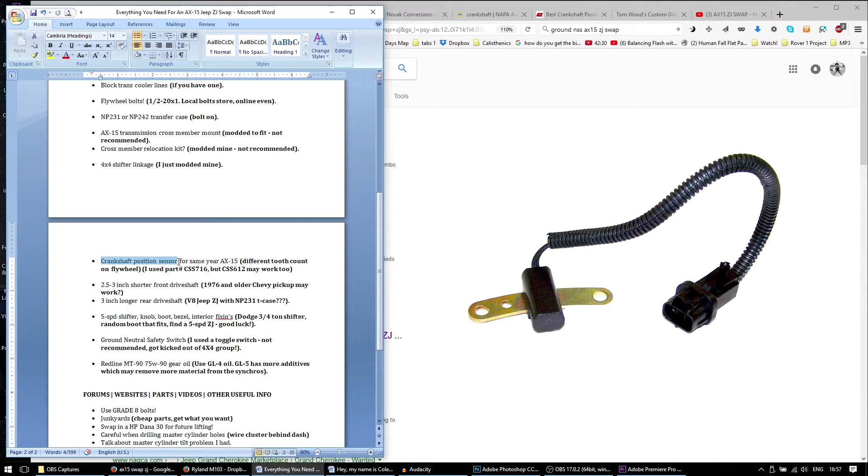Okay, welcome to the voiceover portion of this video, where I will be discussing everything here in point form and in detail. Before I go any further, if I don't talk about something on this list, for example the crankshaft position sensor, if you don't get enough info on this from me today, you can refer to my videos already existing on my YouTube channel.

Under the playlist 'Jeep ZJ AX15 Swap' or something like that, I'll leave a link to it. I cover more info on the crankshaft position sensor there. And if you can't find more info there, there's always a whole whack of forums you can go and find information on, like Jeep Forum, Mall Crawler, and Pirate 4x4. Guys, it just takes a quick Google search and you'll find all the info you need. But hopefully I'll cover everything you need to know in this video, or at least the bulk of it.

So hey, let's get started. First things first, forums, see my videos. Already discussed that. Second thing, the AX15.

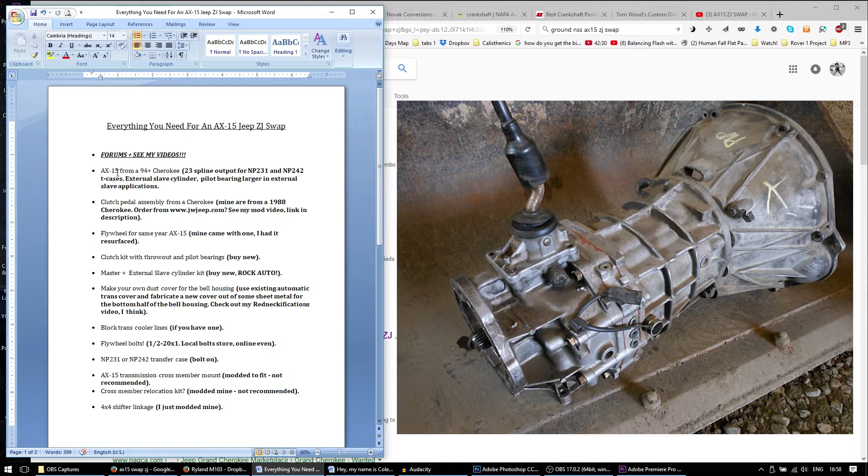This is important. You want an AX15 from a 1994 plus Jeep Cherokee. The reason you want a 1994 plus transmission is because they come with a 23 spline output shaft that slides directly into the 231 or NP242 transfer cases.

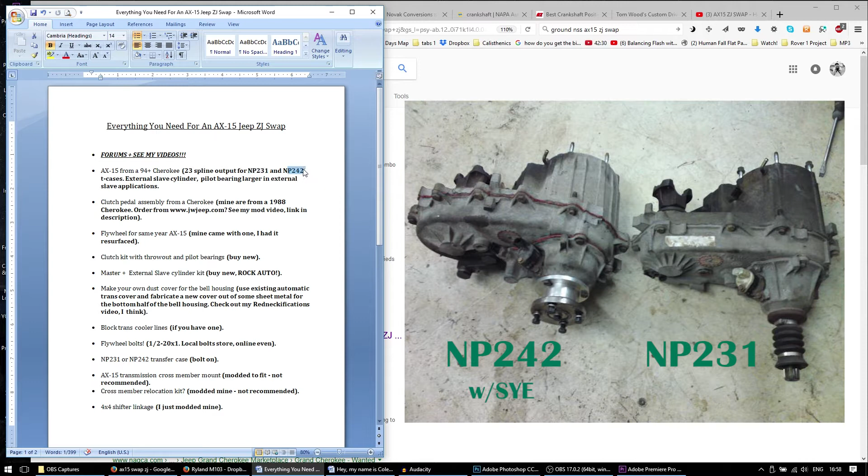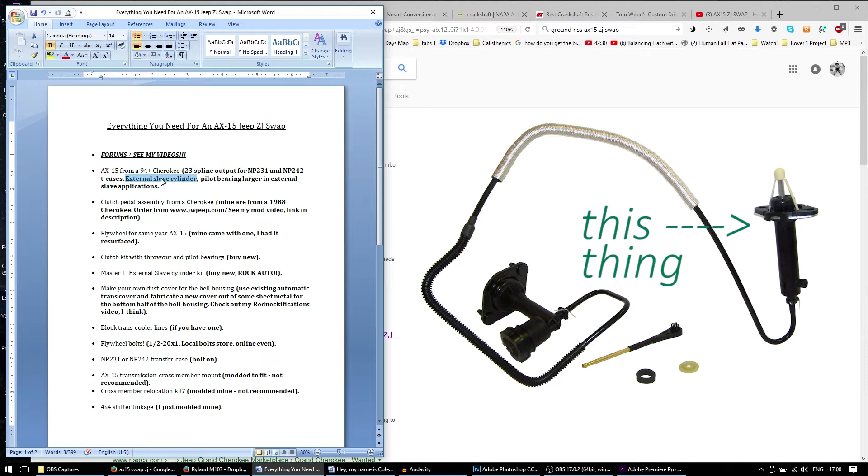Another important thing to look out for when buying a transmission, particularly the AX15, is to look for one that already has an external slave cylinder. You'll save yourself a whole whack of time if you just buy one with an external slave. I think the 1994 plus models already have external. One thing to be wary of: if you buy an internal slave version, not only will you have to get a different bell housing to fit an external slave, but you'll also have to swap input shafts on the transmission itself, because the pilot bearing is larger on external slave applications.

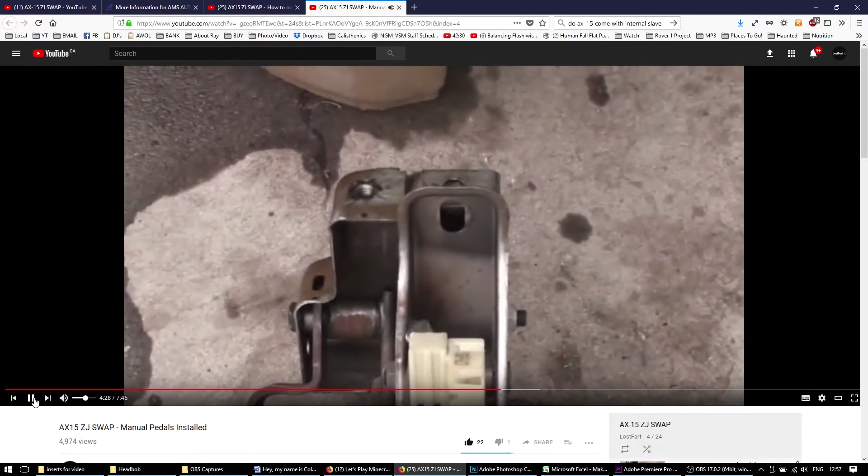Alright, next is a clutch pedal assembly. Now I have a video on this already that details this much better than I'm going to explain it. If you can't find one that's already a stock fit to your Grand Cherokee, which good luck, just get one from a Cherokee, any year Cherokee, and modify it. If you want to go stock all the way, you might be able to find one from jwjeep.com. It's a Jeep exclusive junkyard in California, I think. Who knows, they may have a Grand Cherokee with a 5-speed stock. So check them out if you want stock parts.

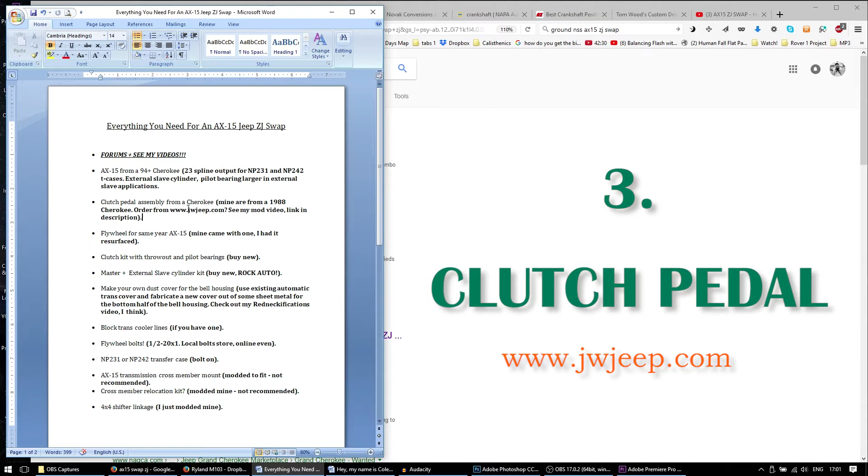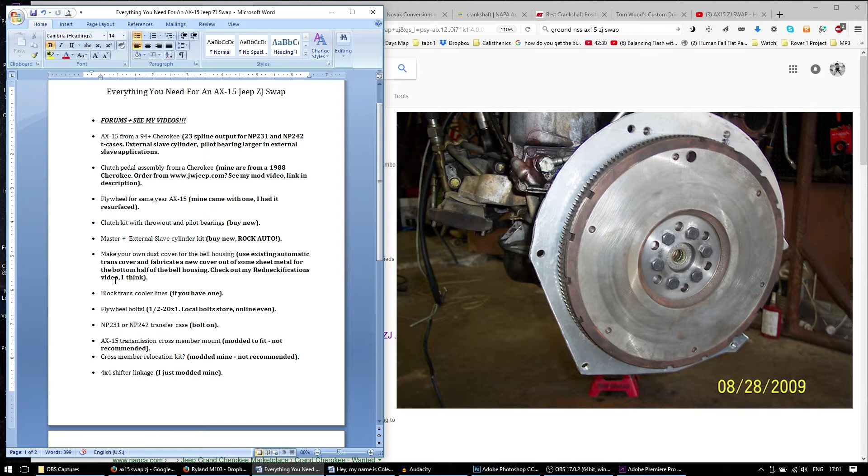You might be in luck. Next on the list is a flywheel. Make sure to get a flywheel for the same year as your AX15. This is important because of the tooth count on the flywheel. The crankshaft position sensor and the flywheel must be the same year for it to work properly.

One thing I didn't get were flywheel bolts. So if you get a transmission and it comes with a flywheel but you're missing a bolt or something, go to your local bolt store. I think they're 1/2 by 20 by 1, so you can even get them online. Any bolts you need, make sure they're grade 8 bolts as well. I wrote that down here. Use grade 8 bolts when you can, always.

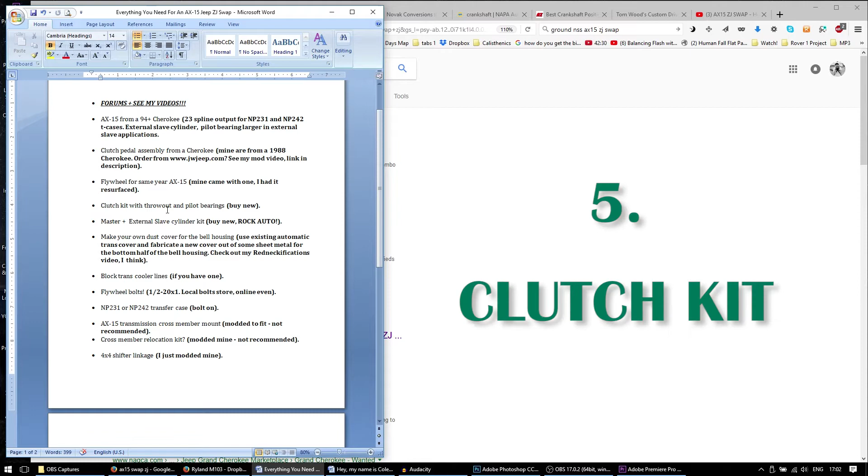Next on the list is a clutch kit with all the fixings. A good site to go to is Rock Auto. Scroll down to Jeep, go to the year. Let's say we got a 1997 transmission, so we're going to go 1997, Cherokee, 4-liter, because that's the motor I matched it up to. Transmission manual, clutch kit, right there, already highlighted. So you've got lots of options, $83.

You've got some high performance ones, $643. Some premium ones, $225, $241. You have lots of options. And say you find one that you like, for example this AMS Automotive one for $103 - it's not bad, not too terrible. You click info, and you can see here, includes all new pressure plate assembly, disc assembly, release bearings, pilot bearings, bushings, alignment tools. So this would be a good one to get.

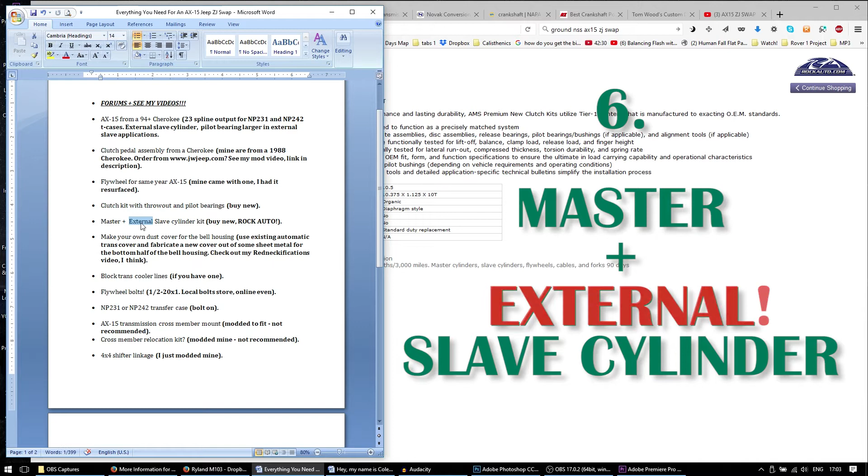It's the full deal. Alright, next on the list is a master and external slave cylinder kit. Now remember, external slave, don't get confused with internal and buy the first one you see on the list. Make sure it's external. This is important.

So again, we'll go to Rock Auto. Let's see, clutch master and slave cylinder assembly, right there, 200. And you can find some kits here - Wagner, LuK, AMS Automotive, same brand. Let's see what that's like. Scroll down, it says external. That would work. You can also see by the looks of this thing, this is the slave cylinder. This is the master cylinder, the part where you put the fluid into. This is what an external slave cylinder looks like.

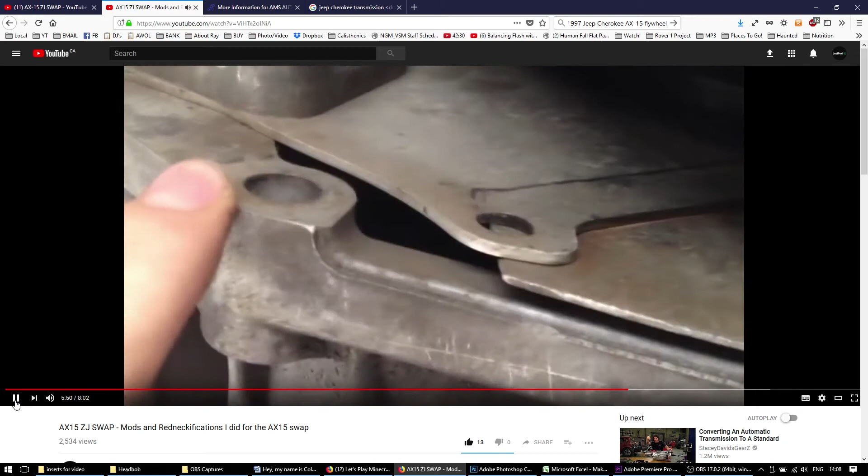Okay, next on the list is make your own dust cover. So a dust cover is the part that goes kind of between the transmission and the engine block. Now the automatic dust cover fits, but it only fits about halfway because of the design. So what I did was I got similar gauge sheet metal and just kind of cut it to fit and drilled some holes, put it up there, and it worked great. I think in my redneckifications video, I talk about that in more detail, and you can see actual video of it.

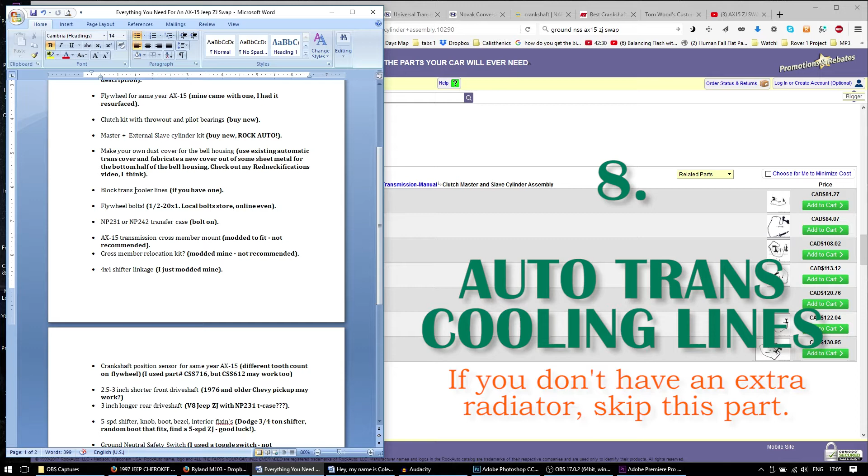Okay, next on the list is your transmission cooling lines. Now when you put a manual transmission in, you can't use the cooling lines from that extra small radiator. So you can either just remove the rad, or just block the lines with a couple Sharpie pens. That's what I did, a couple Sharpie permanent markers. Again, you might be able to see that in my redneckifications video.

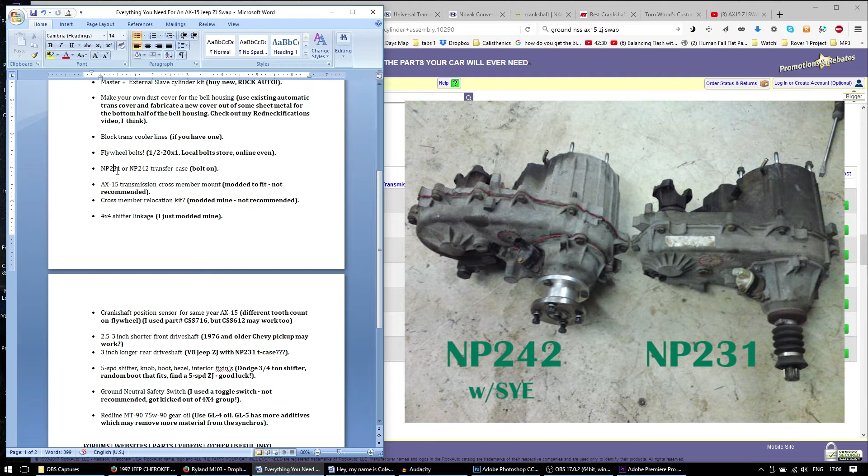Next on the list is an NP231 or 242 transfer case. Now the reason these two are the ones I listed is because they're bolt-on. The NP249, don't know if it's bolt-on. Don't know, but the 242 is for sure - that's the one I use with my Jeep. And the 231 is bolt-on as well. They just kind of slide right in, bolts right up, no further mods. Easy, plus they're far superior in my opinion.

And this one, the 231, is smaller and lighter. So if you care about weight, go for that one. You can find them in Cherokees.

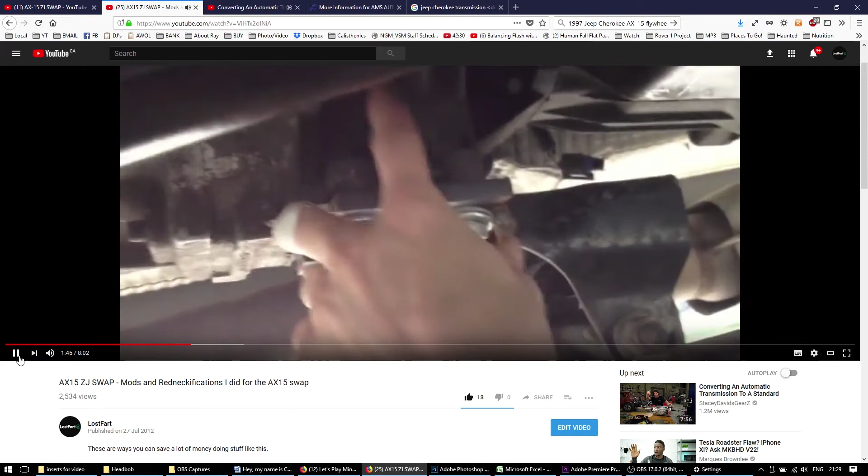Okay, next is the cross-member mount. This I didn't understand in the beginning and there wasn't much info for me, so I kind of had to redneck it together. You can see that in one of my videos, maybe the redneckifications video? I'm not sure, but basically I just got some chunks of metal and welded together a mount. It's not the safest, but it worked.

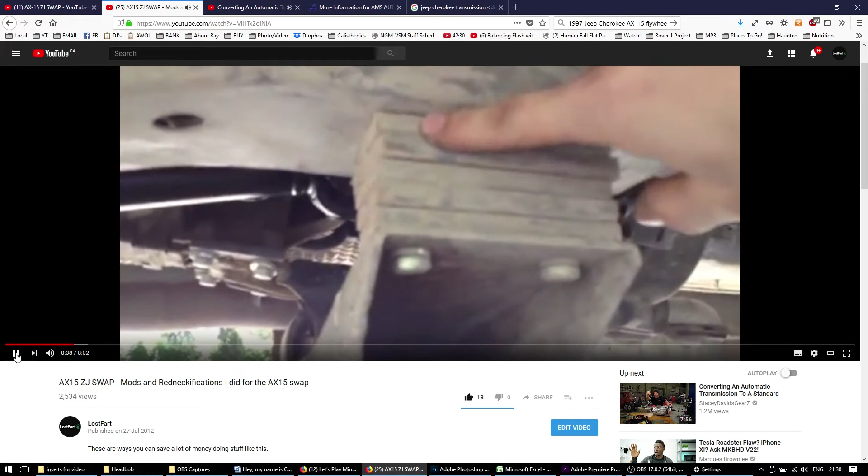So it's something to consider.

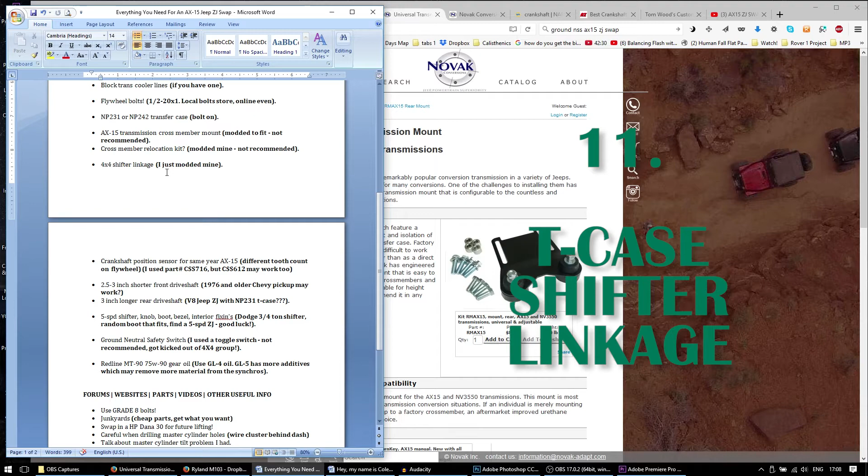Novak Conversions 4x4 shifter linkage. Because the transmission itself is 3 inches physically shorter than the 42RE automatic that came with my Grand Cherokee, the 4x4 shifter linkage was now 3 inches out of place. So what I ended up doing, and you can see this in my redneckifications video, I just got a piece of 1/8 inch steel, welded it to the unibody, and drilled a hole in it. That was the easy, simple solution.

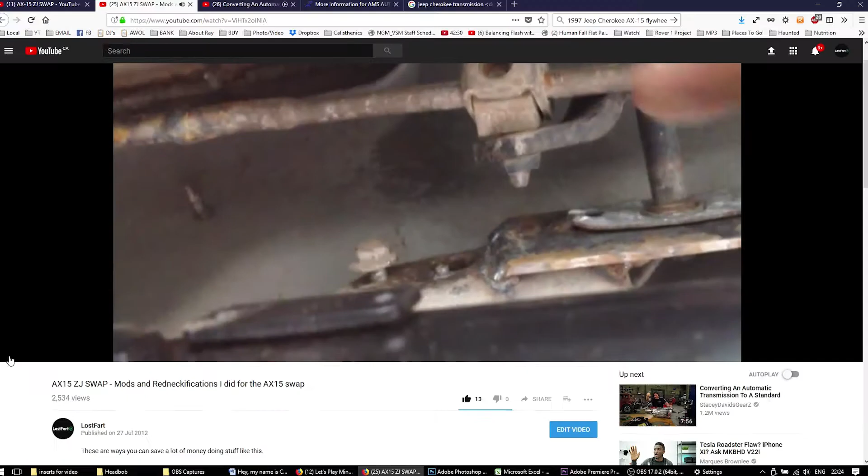You can buy stuff here. So I went to Novak Conversions, to transfer cases, shifter linkages, and came across this page, and there's a bunch of AX15 shifter linkages you could probably get to work if you want a more suitable stock looking thing. It really just comes down to the look. It's a very basic operation, so I just honestly recommend getting a piece of metal, drilling a hole in it, moving it forwards 3 inches, and you're done.

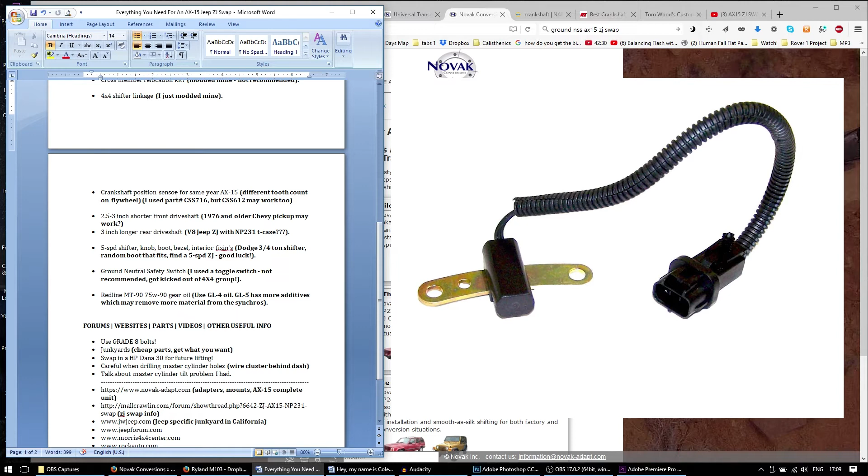Okay, next on the list is a crankshaft position sensor. This is important, I talked about this earlier. You want one for the same year AX15, preferably the same year flywheel, because there's different tooth counts on the flywheels depending on which one you get. You're going to have to Google that depending on your transmission and flywheel, but make sure you have the same year crankshaft position sensor. I don't remember exactly which one I used, but I think I used part number CSS716.

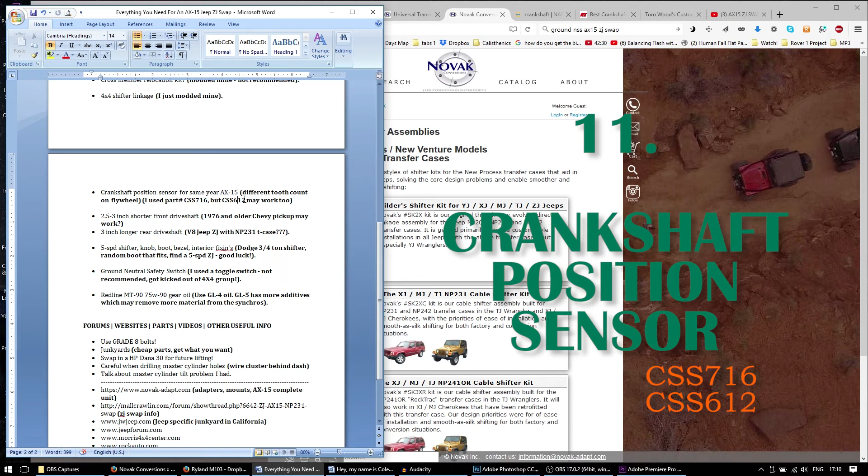I can't seem to find that anymore nowadays. Someone said this one might work, but I can't find that either. I did a little Google search on Napa Auto Parts, and there's a few here that may work, that may fit your Jeep Cherokee.

Okay, moving on to drive shafts. This is probably something that'll catch you by surprise. Oh yeah, drive shafts - they'll have to be different because the transmission's 3 inches shorter. The front drive shaft, because it's a slip yoke, will work without being shortened, but it's risky, very risky. So it's recommended to shorten the front 2.5 to 3 inches because it moves, and lengthen the rear 3 inches, roughly.

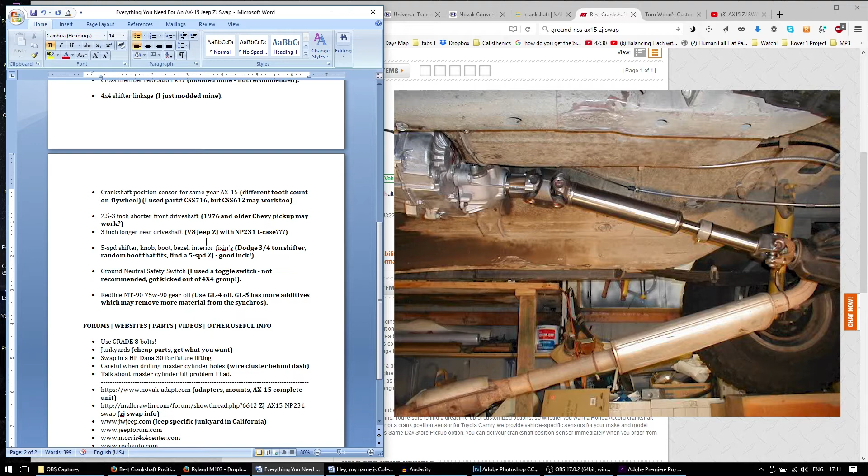For me, I went to a junkyard and found a V8 Jeep with a 231 T-case. I don't exactly remember, it's been a while, but I stole a drive shaft from that Jeep and it was exactly the length I needed.

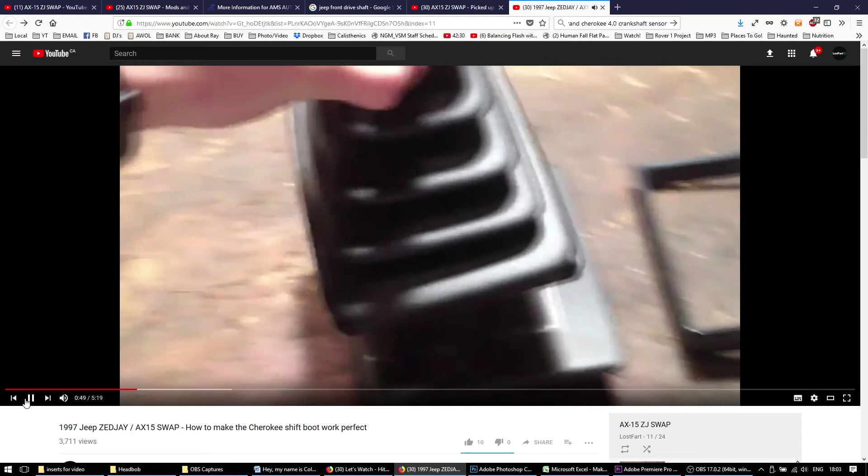So look into that. Okay, next on the list: shifter knob, boot bezel, interior fixins. This stuff is totally custom, unless you can go to that website, jwjeep.com, or find a stock Grand Cherokee 5-speed - otherwise all your interior stuff is going to be custom. I got a Cherokee center console and cut it to fit my floor pan, and I have a video on that somewhere. Then I got a Cherokee boot, and used a Dodge 3/4 ton shifter and knob, and that all kind of fit together and looked pretty cool. You can see in my Jeep videos that it looks pretty nice.

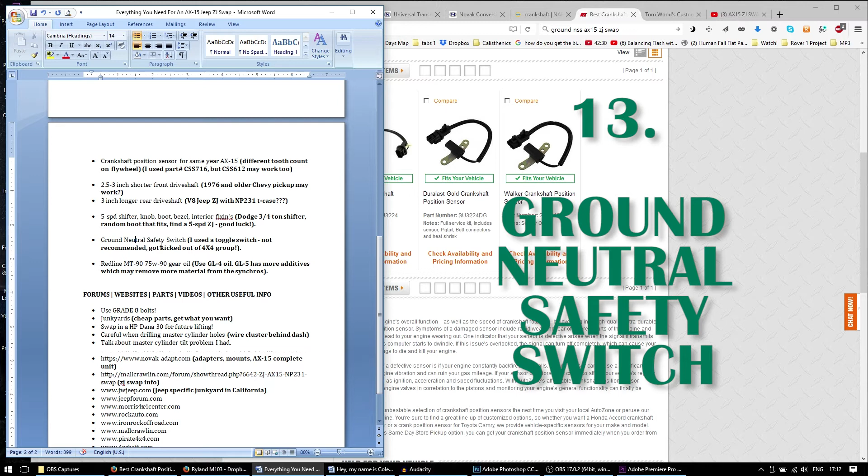Okay, next on the list: ground neutral safety switch. This one's important, I have a couple videos on this alone. It's really easy to ground the neutral safety switch. So when you do the swap, you're going to find a set of wires. Now I forget what the wires are for - let's see, yeah, here's the video I'm talking about, how to ground the neutral safety switch.

End update. You'll find a couple things here. On the automatic, you have your backup lights and your fused ignition switch. On the standard, you have your backup lights and your fused ignition switch, but one thing the standard is missing is the neutral safety switch wire. So basically you're going to have to splice these two wires, backup to backup, fused ignition to fused ignition, and the neutral safety switch is just going to be hanging about. Basically you'll connect that to a toggle switch, ground it somewhere on your unibody, and use that toggle switch to act as your neutral safety switch.

The role of the neutral safety switch is important and actually got me into trouble one day. The role of the neutral safety switch is to prevent you from starting your vehicle in gear. So if you put your automatic Jeep in neutral or park, it will start.

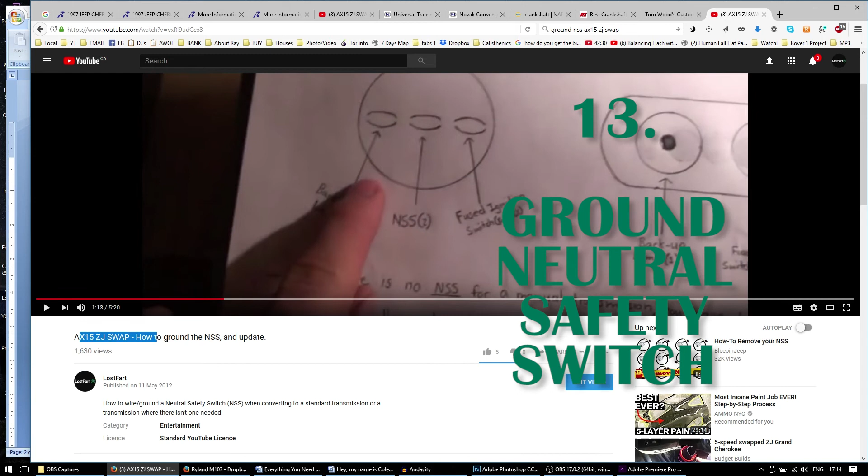Try putting it in reverse or drive, and it won't start for obvious reasons. If you try putting a standard vehicle in gear without putting the clutch down, it won't start either. That's what got me into trouble one day. My brother started my Jeep, and I never had a neutral safety switch engaged, cranked the engine, and it rolled forward and smashed the taillight of this other guy's Jeep. It sucked, but it happened. If you want more detailed info, check out this video: AX15 ZJ swap, how to ground neutral safety switch and update.

Okay, next on the list: gear oil. This is something you might want to consider paying attention to. A GL5 rated gear oil has more additives which may remove more material from the synchronizer rings, which are made of brass, and GL5 may have additives that are corrosive to brass. Whereas GL4 oil, such as Redline MT90, does not have these additives, so it's safer for your synchros. Be all end all, go for a GL4 oil versus a GL5 oil.

And you can find out if it's GL4 or 5 just by looking on the bottle.

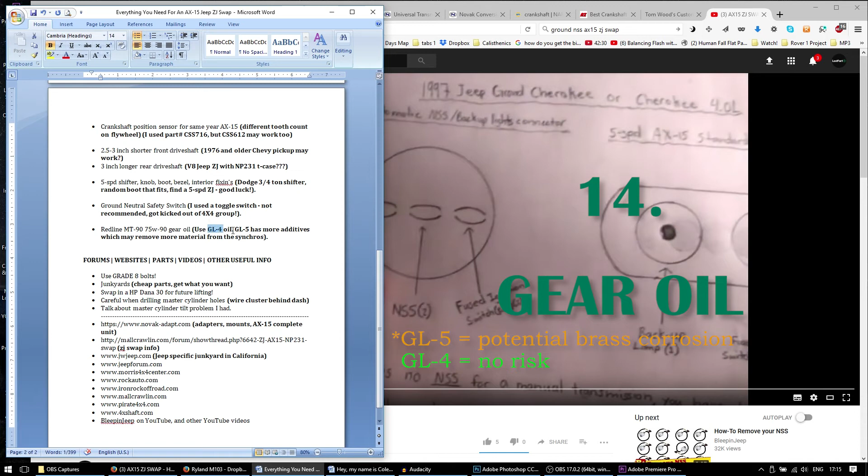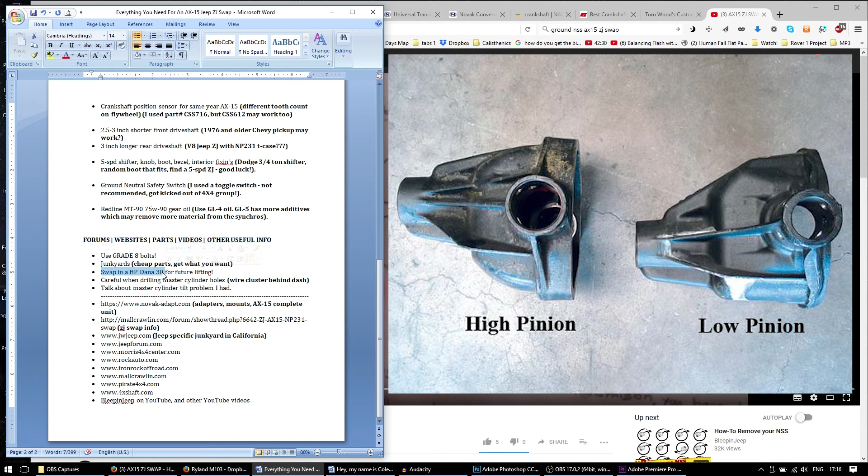Some other useful info: I already mentioned use grade 8 bolts, go to junkyards when you can. Something you might want to consider is swapping in a Dana 30 high pinion. Your Jeep Grand Cherokee cannot come with a high pinion, it comes with a low pinion Dana 30, which is fine, doesn't matter. But if you plan on going off-roading a lot or getting a big lift kit, a high pinion will reduce the driveline angle and reduce the chances of smashing your driveline into rocks. Definitely worth upgrading to a high pinion. Are they stronger? I'm not sure.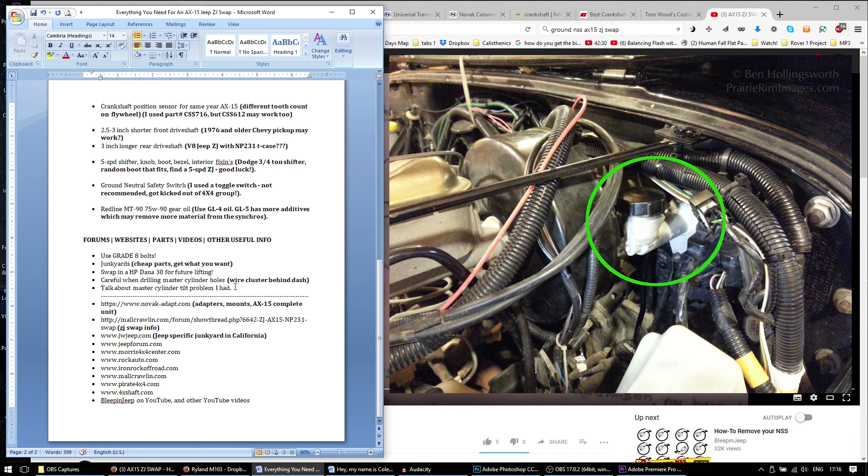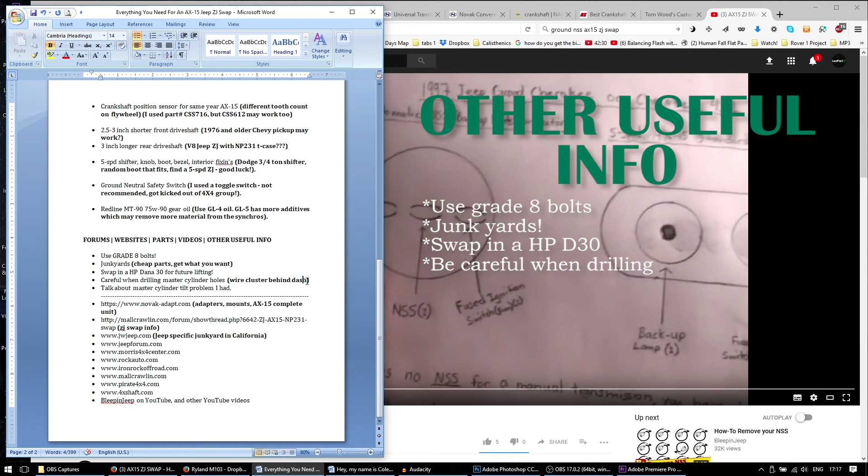Something I should mention, and I have a couple videos on this: be careful when you're drilling for the master cylinder holes. They're already marked out, and there's a blocking plate marked on your firewall on the driver's side. When I drilled into mine to mount the master cylinder, I hit a wire cluster, drilled into 3 or 4 wires, and my dash basically didn't work. I had no speedometer, no odometer, no fuel, no battery gauge. So be careful, or else you have to go underneath and splice them all back together, and that was a pain in the ass.

The master cylinder I bought, I'm not sure which brand, but by the time I mounted it, it had a little tilt. I'm not sure if I cover that in any of my videos. It wasn't a problem for me, but it looked weird. So make sure you test fit your master cylinder, put it up to the firewall and make sure the holes line up. If they don't line up, just drill holes where they do. It's really no big deal.

Here's a list of some sites you can check out. 4xshaft.com, where you can get some nice Tom Woods custom drive shafts. These are really expensive, but definitely worth it if you have the money. Iron Rock Off-Road is a website me and my dad have used a couple times, same with Rock Auto. I've dealt with IRO a lot, I know them by their names, they're very helpful, they'll get whatever you want over the phone right to your door. It's a great website, highly recommended. Bleepin' Jeep is very helpful on YouTube too, they've got generally great Jeep videos. Matt's a good guy.